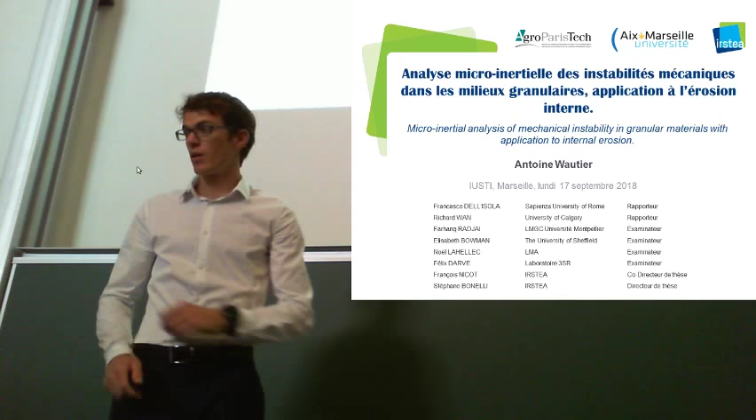So the general context of my research lies in the assessment of the mechanical stability of hydraulic structures, such as dikes or dams. Most of the time, these hydraulic structures are built of natural compacted granular materials, and they are thus permeable to internal fluid flows and sometimes subjected to internal erosion. In the worst cases, internal erosion can cause the catastrophic failure of the hydraulic structure.

To give a few figures, in France we count today more than 19,000 kilometers of dikes with an average failure of one dike per year. Among these failures, 45% are attributed to internal erosion processes.

As a result, this generates the following questions, which were the initial motivation to found my PhD. How does an internal fluid flow affect the mechanical stability of a dike? Will the dike eventually break when it is subjected to internal erosion? Can we know when? How can we build more resilient dikes? And how often should we repair old dikes subjected to internal erosion? Today, nonetheless, I will focus only on this first question.

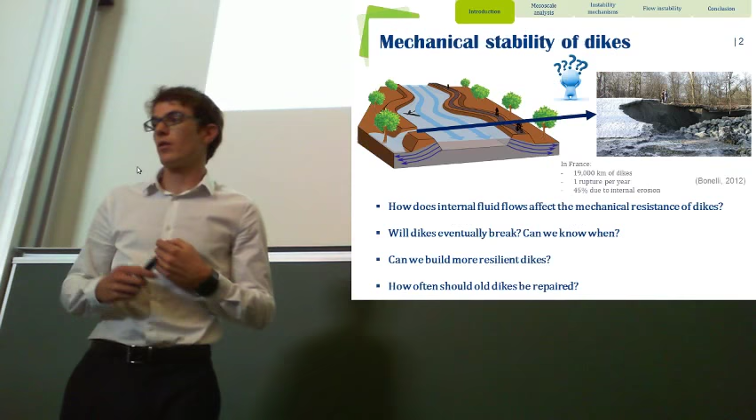Following an international workshop in 2005, it is now widely acknowledged that internal erosion can be subdivided into four elementary mechanisms, namely the backward erosion process, the contact erosion process, piping erosion, and suffusion. Suffusion, which is the selective erosion of the finest particles of a soil, is the least understood of these four mechanisms, and the only one for which there still exists no practical recommendation to prevent its occurrence.

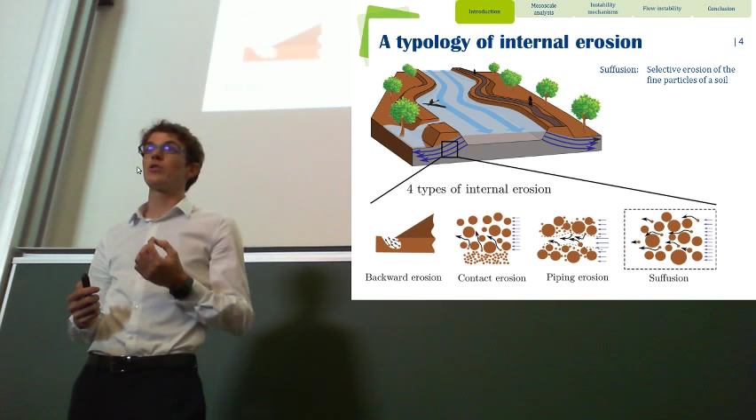In addition, compared to the three other types of internal erosion, suffusion is specific because it is indeed a material scale issue. Locally, an internal fluid flow modifies the microstructure of a granular material, which in turn changes its constitutive behavior at the material point scale.

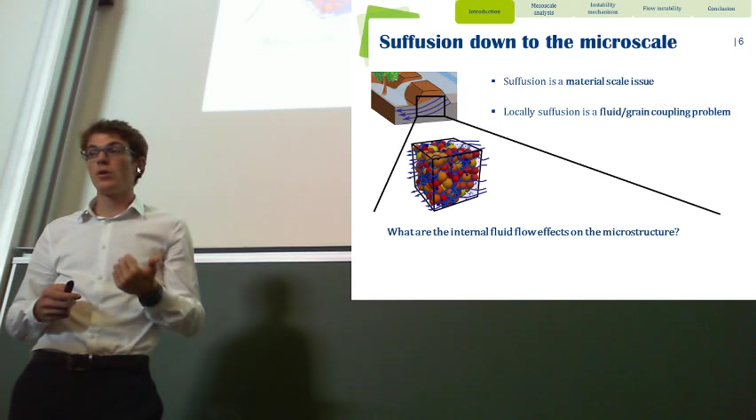From an engineering point of view, taking into account suffusion into the numerical modeling of hydraulic structures has to be done thanks to an evolution of the constitutive parameters of the behavior of the soil at the dike scale. But what are the internal fluid flow effects in terms of microstructure evolution, and how does this affect the mechanical behavior of the soil?

These questions are indeed quite difficult to answer, and this is the reason why historically suffusion was assessed thanks to an internal stability approach. A soil is assessed to be internally stable if it can retain its fine particles inside the material. As a result, most of the existing criteria used to assess the susceptibility of a soil with respect to suffusion are based on geometrical consideration in order to prevent the loss of fine particles. But this criterion dismisses completely the consequences in terms of mechanical behavior.

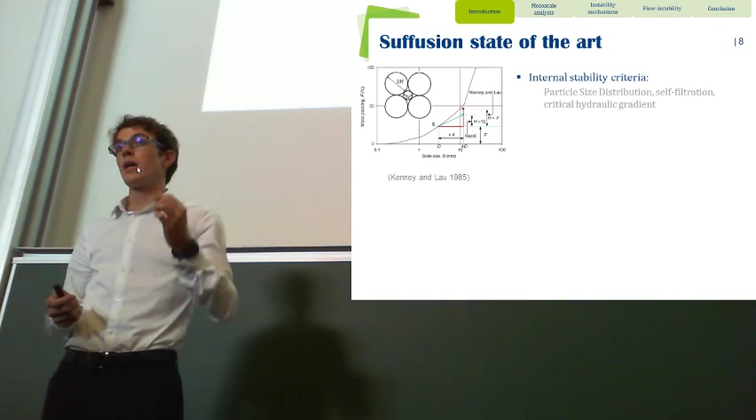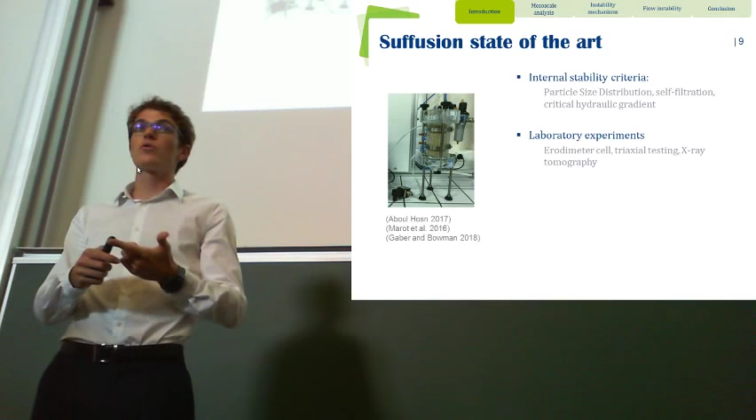In the lab, suffusion has been widely tested thanks to the use of erodimeter cells, and sometimes these cells coupled with triaxial apparatus. This enabled testing of the validity of the different internal stability criteria found in the literature, and also to start exploring the mechanical consequence of suffusion.

More recently, with the increased computational power at our disposal, we found more and more numerical studies aiming at providing some micromechanical basis for this internal stability criterion, and also to start exploring and modeling suffusion directly at the microscale thanks to fluid grain coupling schemes.

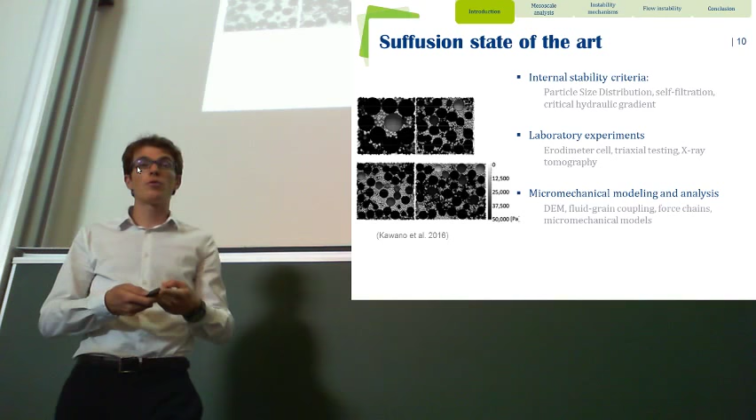However, so far, all these approaches have some limitations, and I'd like to mention a few of them. From the experimental side, it has been reported several times that in the erodimeter cells, suffusion tends to localize along the boundary of the erodimeter cell. As a result, what is measured experimentally is not necessarily a material scale issue, but is strongly influenced by the geometry of the erodimeter cell.

Moreover, even if some apparatus exists in the world, it is still very difficult experimentally to impose simultaneously a mechanical stress loading and a hydraulic loading. As a result, there are still few studies that can account for the influence of the stress state on the occurrence of suffusion.

On the numerical side, the 3D fully coupled fluid grain coupling problem is still very computationally expensive, and many numerical analyses performed to address the problem of suffusion tackle this problem either by not plugging the fluid in and using particle removal processes, imposing a partial fluid grain coupling, or even sometimes by dealing with non-physical 2D problems.

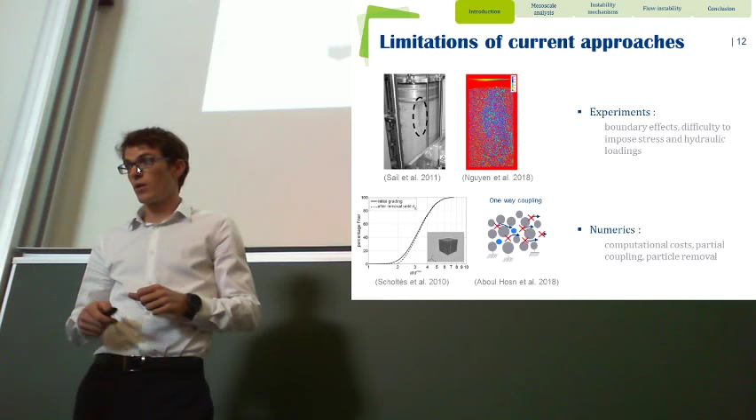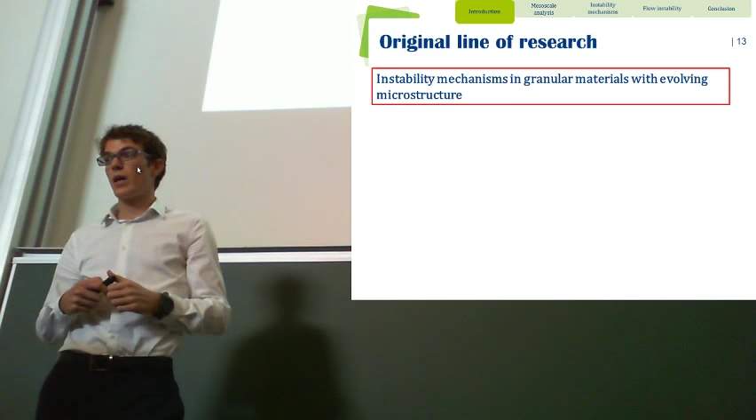In order to avoid producing this same bias, the original line of research I developed in my PhD was to step back and address the more fundamental issue of instability mechanisms in granular materials with an evolving microstructure. In order to address this issue, my methodology was focused on three points.

First, model the full complexity of the physical process at the representative elementary volume scale in 3D, with the use of a fully coupled and fully resolved fluid-grain coupling scheme. Then replace the concept of internal stability by the concept of mechanical stability, achieved thanks to the general criterion of the second-order work.

And then adopt a micromechanical point of view in order to analyze the driving physics of granular materials at the mesoscopic scale and understand what could be the mechanisms responsible for instability linked to suffusion.

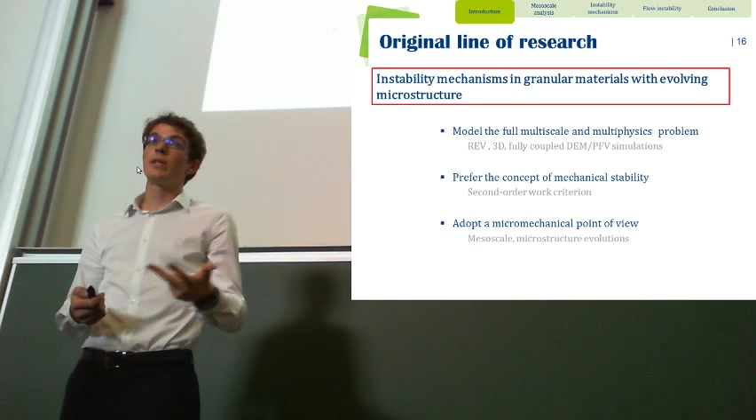In the remaining slide of this extended introduction, I'd like to mention the tools and the conceptual framework that back my PhD. The first tool I want to introduce is the numerical code I use to perform all my numerical experiments. I use YADE software, which is an open source DEM code developed at the 3SR lab in Grenoble.

In this code, both the grain-grain interaction is accounted for thanks to the simple elasto-frictional contact law, and the fluid-grain coupling scheme thanks to the recently developed pore-scale finite volume scheme, which enables the fluid-grain interaction to be accounted for locally with a fully coupled and fully resolved numerical scheme.

And today, it is probably one of the few coupling schemes that enable tackling 3D problems at the scale of the representative elementary volume.

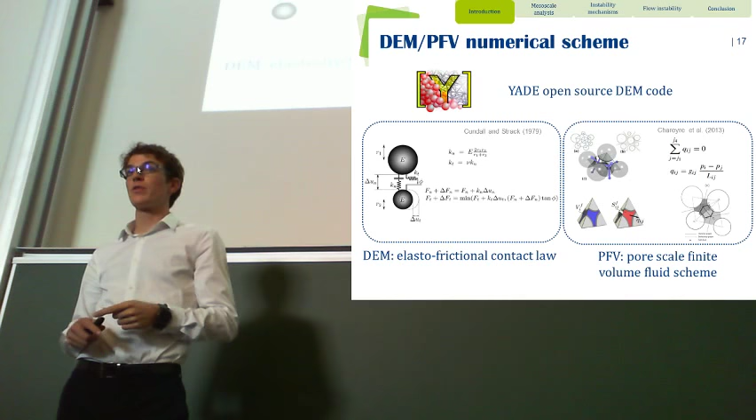When a stress state is applied to a granular material, the granular materials reorganize to build elongated structures able to transmit stresses through the medium. As a result, a granular material can be seen as a two-phase medium, with chain grains that transmit stresses in the medium, and non-chain grains that provide lateral support to the elongated structures.

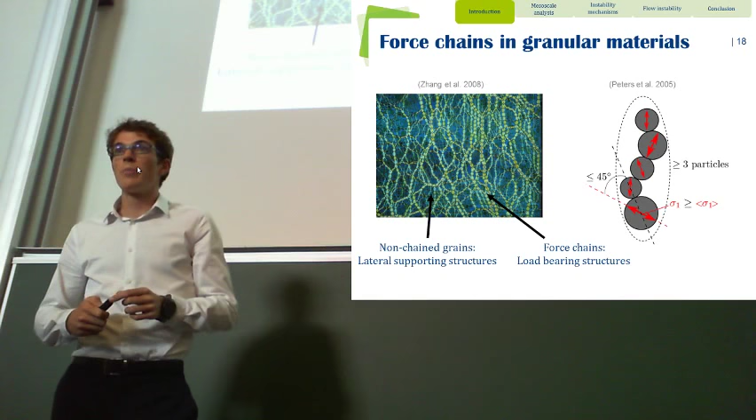In all my PhD work, I used the definition of force chains introduced by Peters et al. in 2005 to define what I call a force chain in my medium. This definition is based on three criteria.

First, the grain should be heavily stressed, meaning that the principal stress in each grain should be higher than the average principal stress in all the grains. Then the direction of compression should be aligned with the direction of contact between two adjacent chain grains.

And then a force chain should be constituted of at least 3 particles, in order to generate some internal degrees of freedom and deal with a real structure.

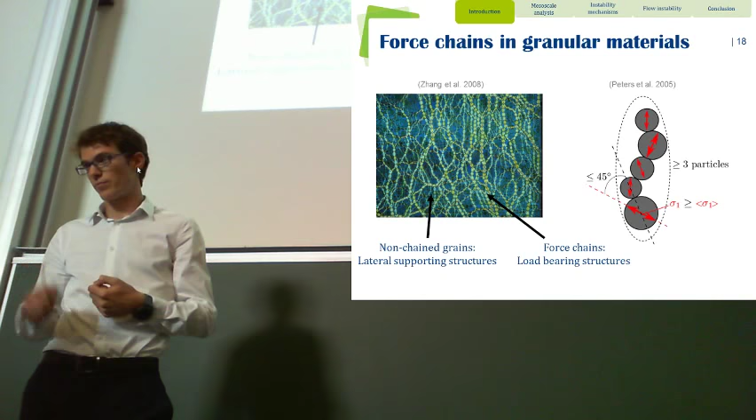As I started to mention earlier in my introduction, I wanted to replace the widely used concept of internal stability by the concept of mechanical stability. Because what is really at stake when we consider suffusion in dikes is the creation, by the fluid, of an underlying mechanical instability that will be triggered later on when the mechanical loading is slightly changed.

So the real question at stake to address the consequences of suffusion is: what will happen if the mechanical loading is slightly changed? Will our material collapse or not?

Starting from an equilibrium state, the variation of kinetic energy is the sum of two terms: one applied on the external boundary of the solid considered, and one being minus the integral of the second-order work inside the medium.

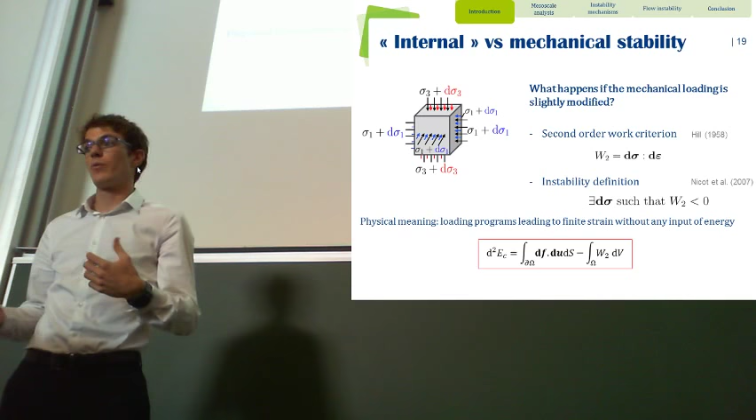More or less, this cone of instability corresponds to this physical situation where we impose macroscopically a slight deconfinement of the sample.

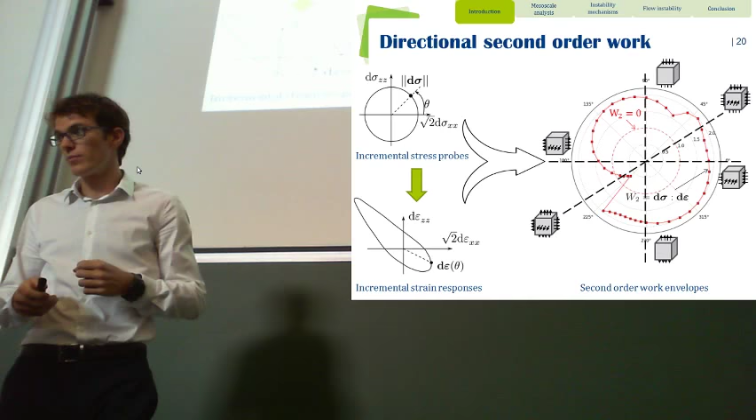So the rest of my presentation will be divided into 3 parts, corresponding more or less to 1 year each of my PhD.

First, I want to introduce the definition of mesoscopic scales in granular material. If we want to study the suffusion phenomenon at the material point scale, there is a need to define a sample of soil sufficiently big to be representative of the phenomenon. This will be the first part of my presentation today.

Then I will show you some results on the onset, detailing the driving mechanisms responsible for instability in dry granular materials. And then I will conclude by showing you the specific impact of a fluid on the mechanical stability of a granular material.

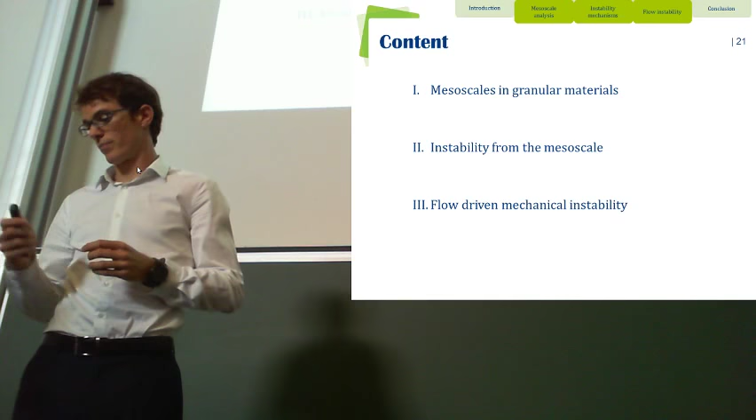From a conceptual point of view, the whole domain occupied by a granular material can be decomposed into 4 subdomains. On the grain side, we can distinguish between heavily stressed grain and loosely stressed grain by defining chained and unchained grain.

On the fluid side, we can replace the complex geometry of the pore space with 2 pore networks: an accessible pore network and a non-accessible pore network, with respect to the size of the particles moving through the pore space.

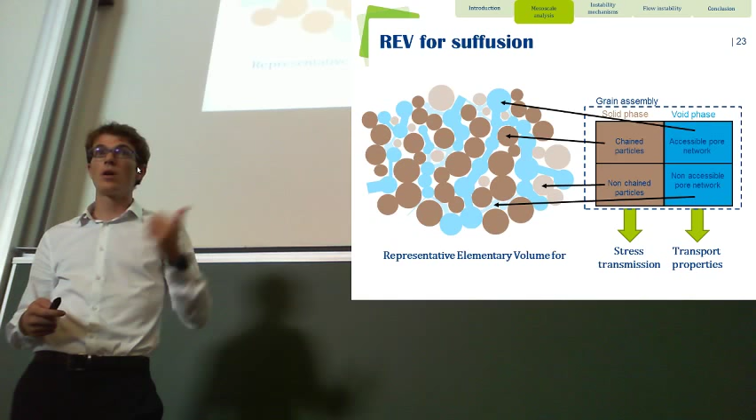These partitions introduce two elementary scales in between the grain scale and the hydraulic structure scale that I will call mesoscopic scale, enabling the definition of a representative elementary volume with respect to both stress transmission and transport properties inside the medium.

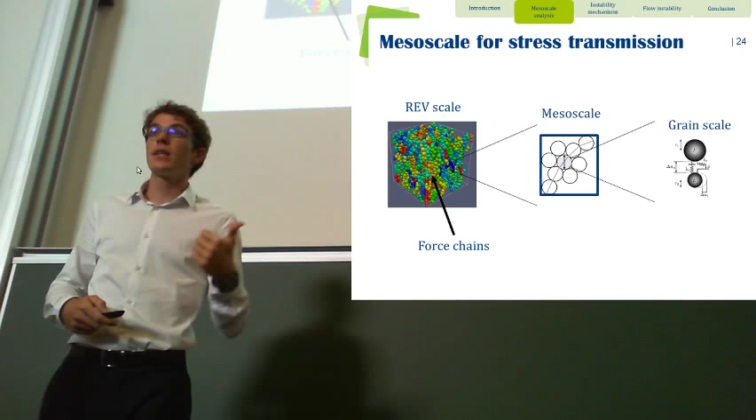For stress, we can distinguish between chained and unchained grain. Actually, the mesoscopic scale here in between the grain scale and the material point scale is linked to the spatial distribution of force chains.

In practice, to quantify this spatial distribution, we can use the 2-point spatial autocorrelation function. This is C of h, defined as the joint probability that a given point x and the translated point x plus h simultaneously belong to the chained particles.

If the vector h is 0, we simply recover the volume fraction of the chained particles in the material. On the contrary, if h tends to infinity, because of the independence of probability, we get the square of this volume fraction. So if we renormalize this function in this form, we get a function that decreases from 1 to 0 as h goes from 0 to infinity.

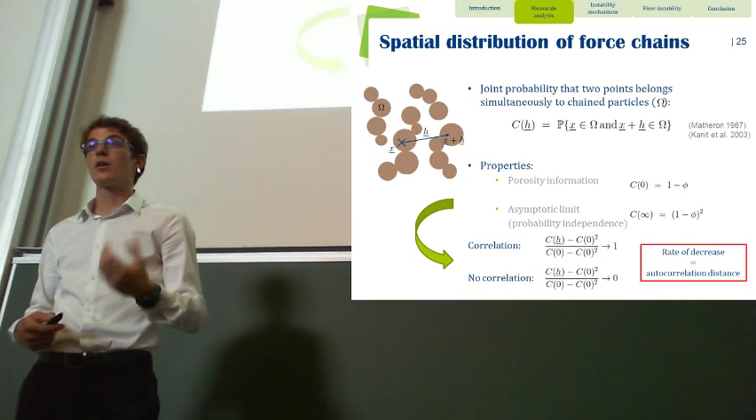The rate of decrease of this function gives us the autocorrelation distance in our material for any direction h. In practice, we have 3 principal directions oriented with the 3 principal axes of the principal stress loading directions, and we estimate these distances numerically using an exponential fit, introducing 3 length scale parameters which constitute my 3 length scales characterizing stress transmission in the granular material.

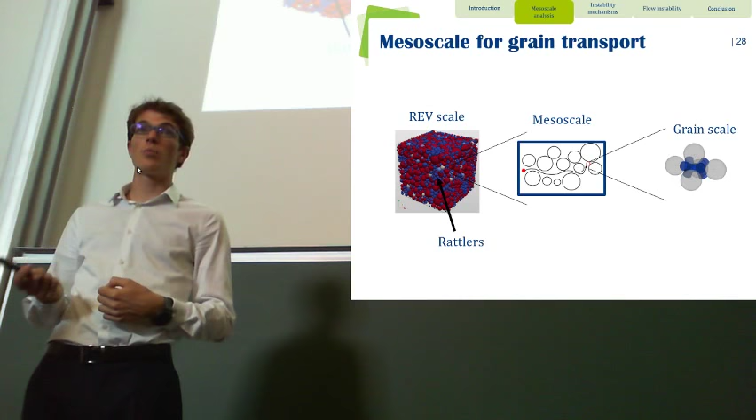and the rattling particles with 0 coordination number in absence of gravity, shown in blue, we want a good idea of how far the blue particle will travel to assess the representativeness of our sample for studying transport properties. This is done by replacing the complex geometry of the pore space with a mathematical oriented graph.

In my PhD, two different graphs have been proposed: one based on the tessellation of the pore space based on all particles, including the free particles, and one based on the tessellation of the void based only on the particles that are geometrically blocked.

This defines the geometry of the pore network, and then to get the orientation, we have to define a pressure map on it. We have two ways of defining this: either by simply linearizing a macroscopic pressure gradient, or by taking into account local pressure fluctuations, done thanks to the application of a pore scale finite volume scheme.

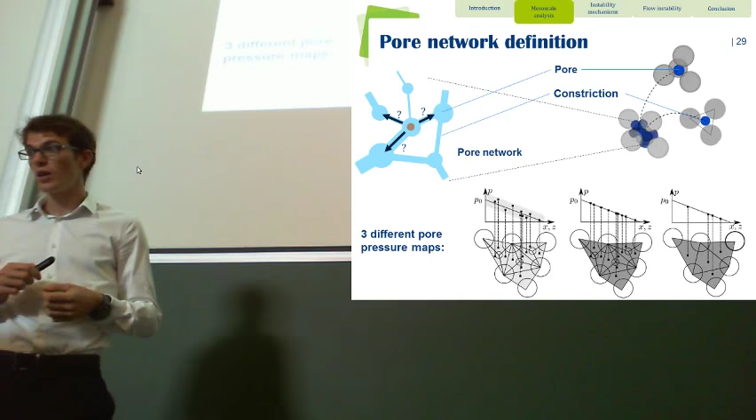The last ingredient to get the oriented mathematical graph is to define a flow intensity propagation criterion. This is based on two assumptions: that a fluid between two adjacent pores will flow in a circular tube as a Poiseuille flow, and that the force acting on a particle traveling inside the pore space will scale as a viscous drag force, proportional to the fluid velocity.

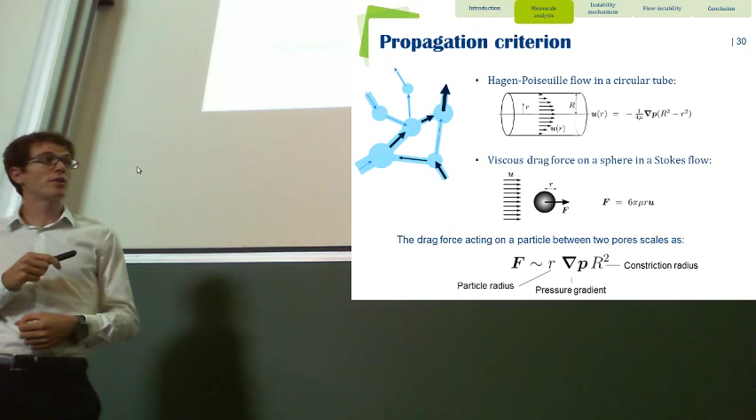As a result, the driving force that makes particles move inside the pore space should be equal to the particle size times the pressure gradient times the constriction radius squared. These two last terms constitute what I call the flow intensity in my pore network.

A particle in this network will then move according to the path of maximal flow intensity until it gets blocked by too narrow constrictions. This enables us to assess transport properties inside the pore space without running any fully coupled fluid-grain simulation.

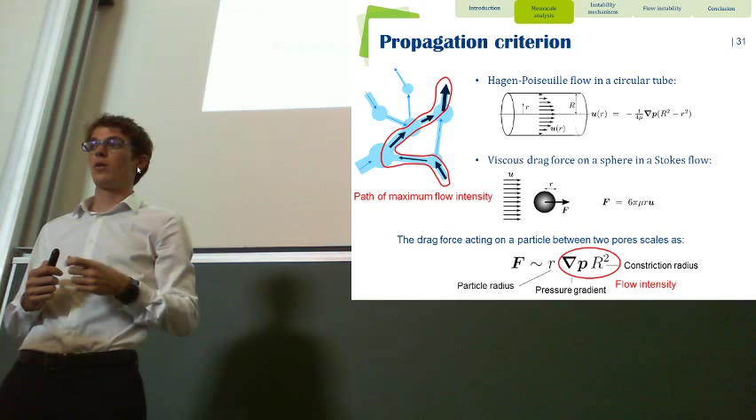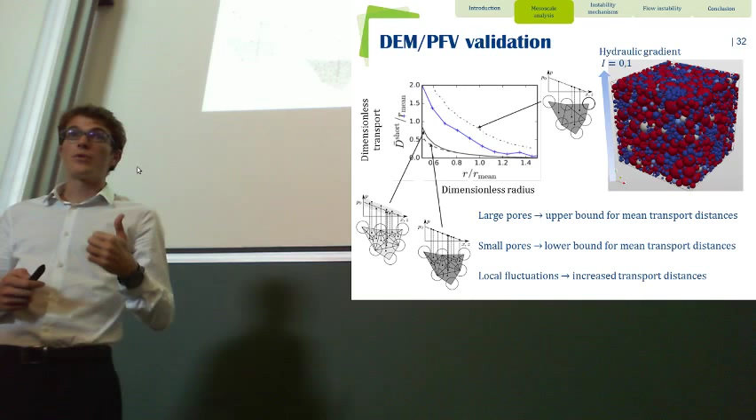Now that we have defined a sample representative for studying suffusion, I want to show you some results highlighting the driving mechanisms at the mesoscopic scale responsible for the vanishing of the second-order work criterion.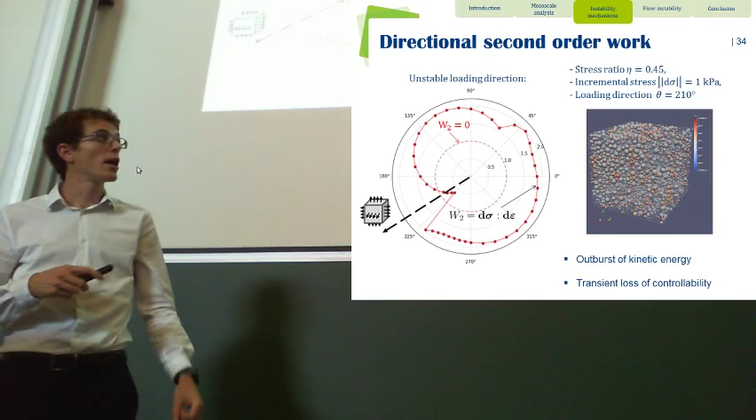As a result, we see a nucleation of an outburst of kinetic energy that rapidly propagates to the whole sample, generating generalized particle reorganization and, macroscopically, a transient loss of controllability.

To analyze what is going on inside our sample during this incremental loading, we use the force chain definition and define what we call force chain bending. For a group of three chain particles, this is defined by an angle beta, which evolves: if this angle increases, it means the force chain goes from a straight line configuration to a bending configuration.

On the left, I show on top the evolution of the average kinetic energy for all particles, in black, or for only the particles located in a small control volume around the location of the nucleation of the kinetic energy outburst.

On the bottom graph, I show you the mean evolution of the derivative of this angle, so the mean bending rate, either for the whole sample or for the local control volume here.

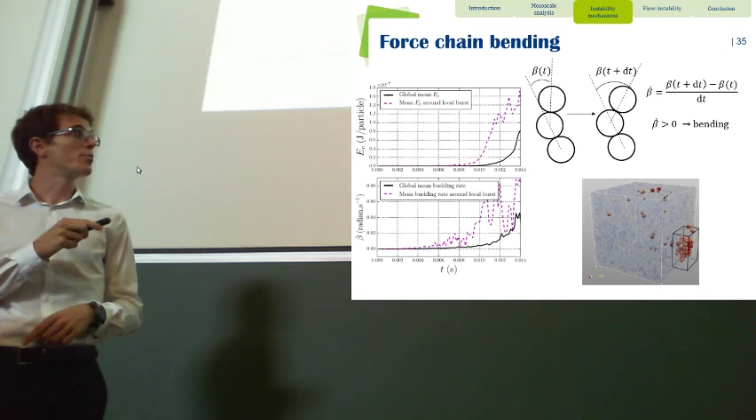What is shown by the comparison with these two graphs is that we have a localized bending which is preceding the loss of controllability and the outburst of kinetic energy.

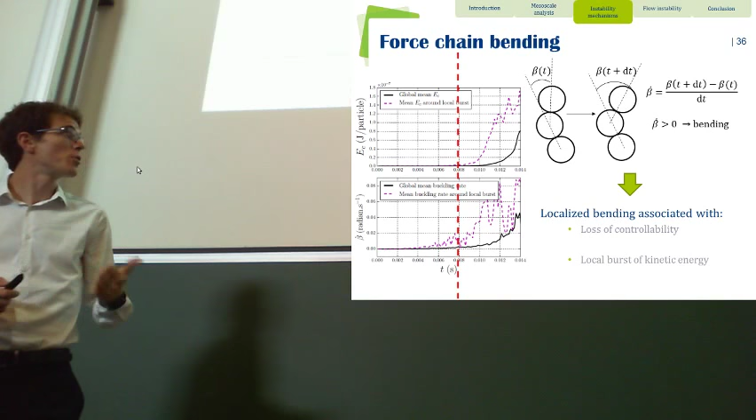Another micromechanical insight we can get from the definition of force chains is that we can track the number of contacts with respect to time while we are applying this incremental loading. Here, based on the force chain definition, we define 3 populations of contacts.

In blue, we have the contacts between non-chain and non-chain particles. In red, the contact between chain and chain particles. And more interesting are the contacts in green, which correspond to the contact between non-chain particles and chain particles.

On the left, I show you the evolution of the 3 contact populations, either for the whole sample, which is the graph on top, or for a small control volume around the location of the outburst of kinetic energy, which is materialized here by the 2 vertical black lines.

Here what is interesting to see is that first the number of contacts between chain and non-chain particles decreases, which means that we have a local deconfinement of the force chains, followed then by the bending of force chains, and then the collapse of force chains, and then a final increase in the number of non-chain contacts, because here we are considering a loose sample which is getting denser as collapse occurs.

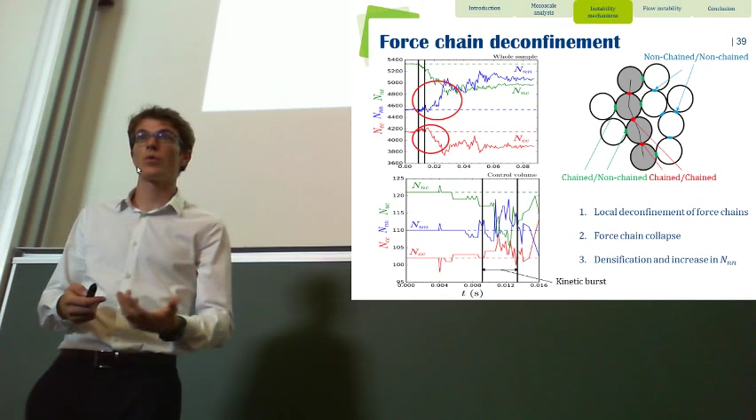Another thing we can do with DEM is to look at microstructure evolution impact on the mechanical stability. This is very easy, for instance, to increase or decrease the number of free particles inside our sample.

This is representative with respect to the suffusion mechanisms phenomenon we want to study, related to either the massive erosion of the fine particles of the sample or a massive clogging of particles as coming from upstream in the dike body.

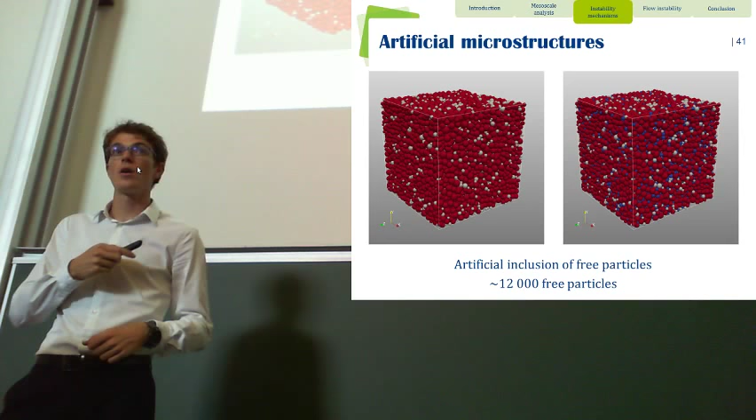On the contrary, here I show you this microstructure evolution when we include more free particles, with the blue particles on this graph. In terms of mechanical stability, if we perform a directional analysis and look at the circular diagram of the second-order work.

Here we see that in all cases we still have a vanishing of the second-order work criterion. So our material is still unstable with or without rattlers.

But what is interesting to look at is that the size of the cone of instability varies when we vary the number of free particles. And the more free particles you have in the sample, the more stable it is.

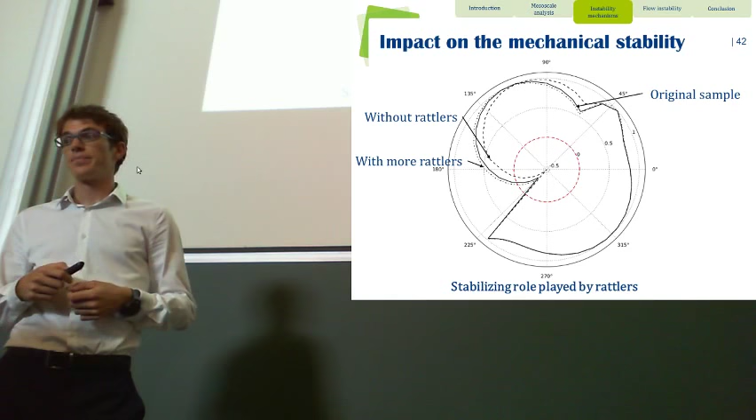This stabilizing role of free particles can be interpreted from a macroscopic point of view with the use of the classical paradigm of elastoplasticity. Indeed, rattlers, by getting jammed as force chains collapse, prevent the development of large incremental plastic strain.

This is the first impact on the constitutive behavior of the material played by rattlers. The second impact is a little more subtle and is linked to the fact that the stress state we are considering is not isotropic. As shown in the first part of my presentation, we have vertically oriented force chains in the medium, and when collapse occurs, it occurs principally along the direction of principal compression.

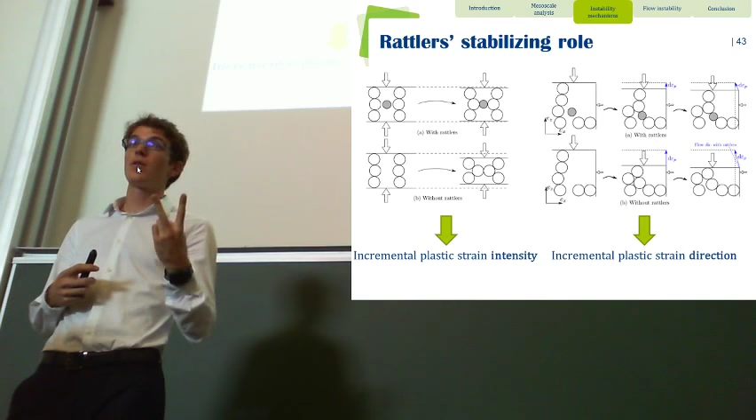So, the difference between the situation with or without rattlers generates a slight change in the direction of the incremental plastic flow. So these are the two impacts of rattlers on the constitutive behavior of a granular material.

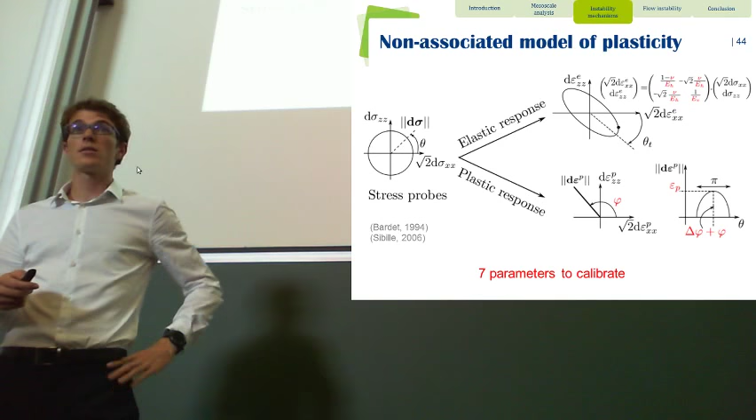If we calibrate these 7 parameters and look at the initial sample, we are perfectly able to reproduce the circular envelope obtained numerically by just fitting these 7 parameters.

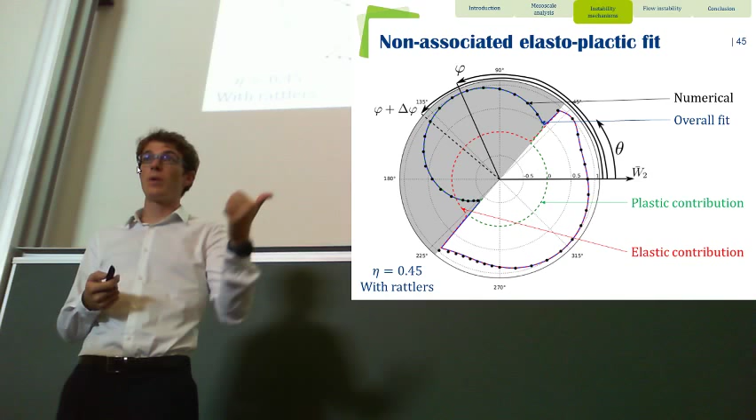And then, using the analysis from the macroscopic point of view, if we just tune the 2 parameters that are the plastic strain intensity and the plastic flow direction, we are able to adapt this model to describe the 2 artificial microstructures with more or with less rattlers, as shown on this graph. So this validates the particular role played by free particles inside the granular material with respect to mechanical stability.

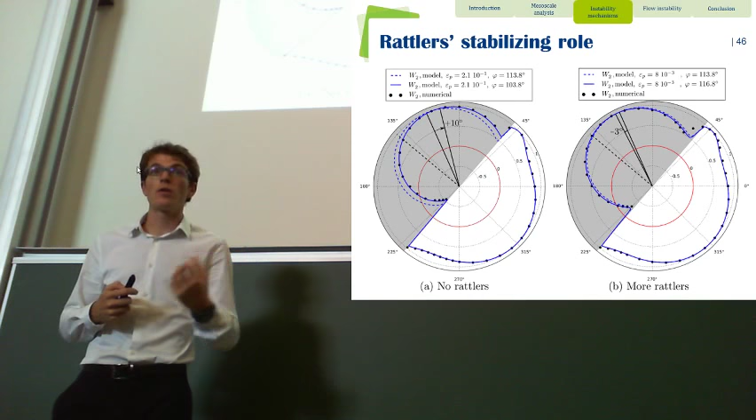To finish my presentation, I will show you some results obtained on the specific role played by the fluid with respect to the mechanical stability of granular material.

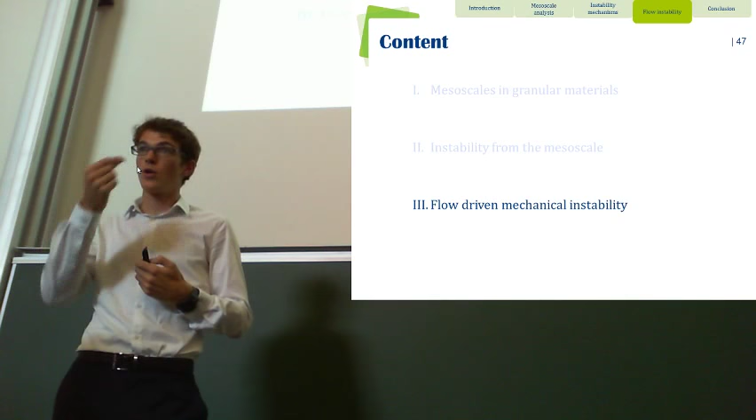Indeed, the fluid impact on a granular material is twofold. The first impact is to make the free particles inside the sample move, generating microstructure evolutions simply by the change of location of rattlers in the medium. The second impact is to introduce additional forces on the grains constituting the primary skeleton, forcing stress reorganization in the medium. So I will explore these two aspects in this part of my presentation.

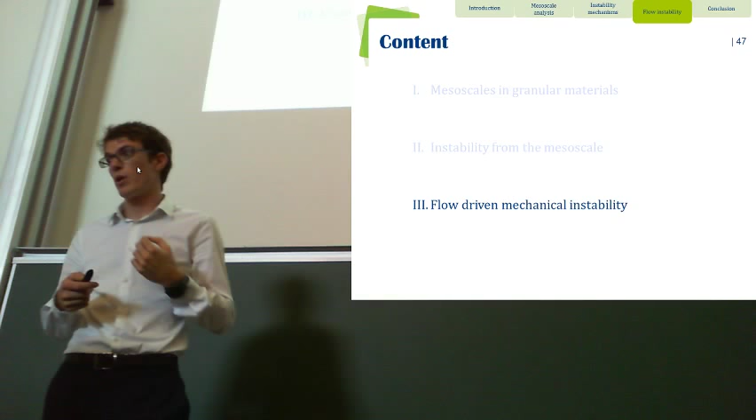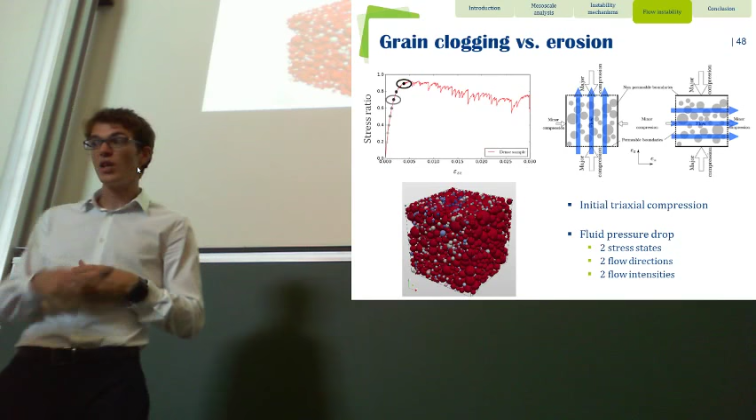The first aspect is the simple transport of free particles inside the medium. Here I am considering a widely graded sample with a quite significant fine fraction, and I am considering 6 simulations consisting of 2 stress states, shown on the classical drained triaxial loading curve, 2 flow directions, either parallel or perpendicular to the principal stress direction, and 2 flow intensities. Here is the situation of one of these 6 simulations.

The 2 samples, the 2 stress states I've been using are not chosen arbitrarily. One is considered to be stable from the mechanical point of view, and one is considered to be unstable, thanks to the use of the second-order work criterion.

But still, we can see the influence of both the stress state and the direction of the hydraulic loading. We have larger erosion if we consider flow oriented vertically, in the direction of the principal stress. And we have larger erosion if we consider the fluid flow for an unstable material.

This can be interpreted by looking again at force chains at the microscopic scale, because in the medium, force chains are oriented in the direction of compression, which makes it easier for a particle to be transported if the fluid flows along the direction of the force chain rather than perpendicular to it.

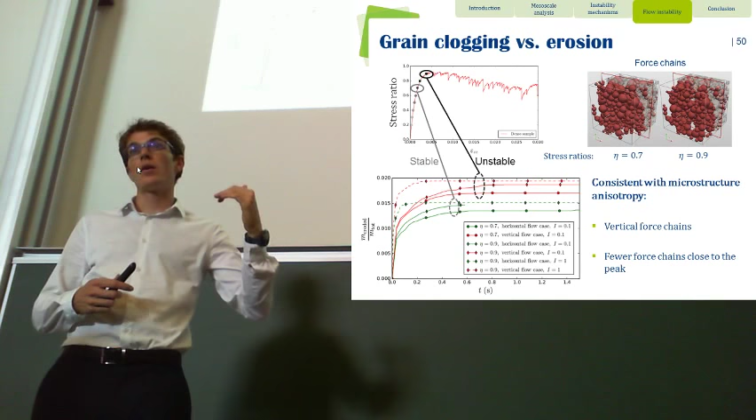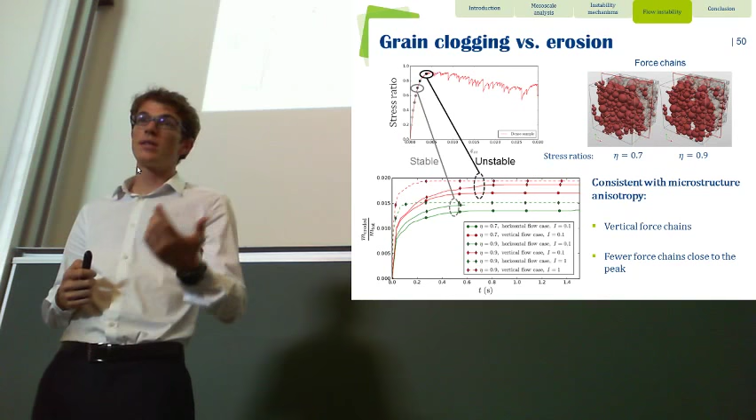The second aspect is that when we go from the stress state eta equal to 0.7 to 0.9, we are actually decreasing the number of force chains as we approach the peak stress and the softening regime, and we are increasing the number of rattlers in the sample. So it is normal to find that the sample at stress state eta equal to 0.9 is more sensitive to suffusion.

Then what is interesting to look at is the evolution of the mechanical stability of the sample before and after applying the fluid flow, and so before and after suffusion. Here, the black curve corresponds to the situation before the fluid flow is applied, and the two blue curves correspond to the situation where a vertical or horizontal fluid flow is applied.

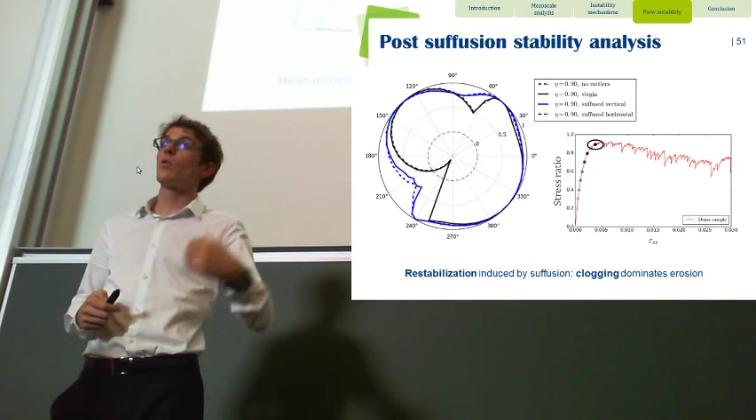What is interesting to see is that here the fluid has a restabilization effect. This is actually completely consistent with the particular role played by rattlers I showed you in the previous part of my presentation. Here, rattlers are not predominantly eroded from the sample, but mostly clogged inside the sample.

The second impact of the fluid I mentioned before presenting the results of this part, is the direct impact of the fluid forces onto the primary fabric of the granular material. Numerically, we can isolate this effect by considering a sample in which the rattlers have been removed before applying a fluid pressure drop. This is done here for two flow directions and for an unstable sample identified with the second-order work criterion.

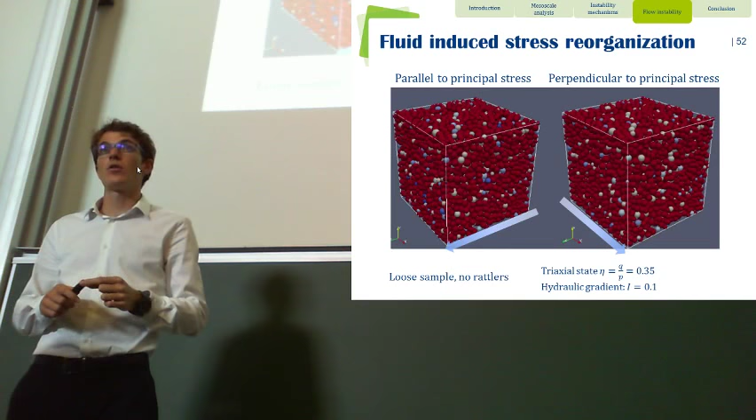In both cases, we observe the collapse of the sample under the fluid flow perturbations. The perturbation introduced by the fluid is able to trigger off the material collapse. This non-sensitivity of the collapse with respect to the fluid flow direction can be analyzed by looking at the distribution of fluid forces at the microscopic scale.

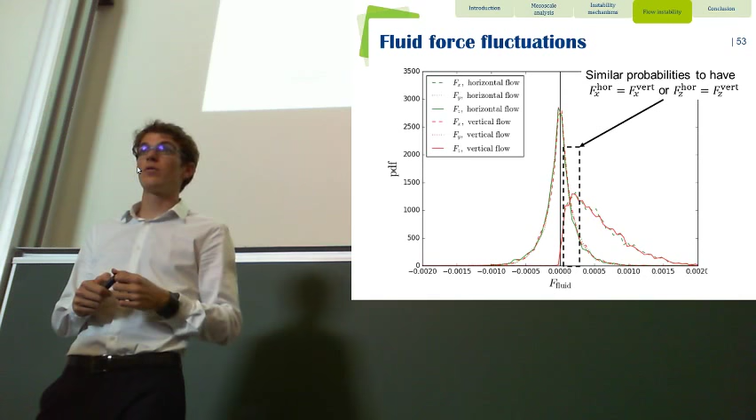As a result, local fluid force fluctuations play an important role in triggering the collapse of the sample. This also advocates in favor of the use of fully resolved fluid-grain coupling schemes.

Before answering your questions, I'd like to summarize my main contribution to the state of the art and provide some prospects for future research projects.

On the method and tools, I'd like to mention that the different micromechanical tools I've been using are not specific to the study of suffusion. I've encapsulated all my functions and methods into Python classes, and I will be happy to share this file with you if needed.

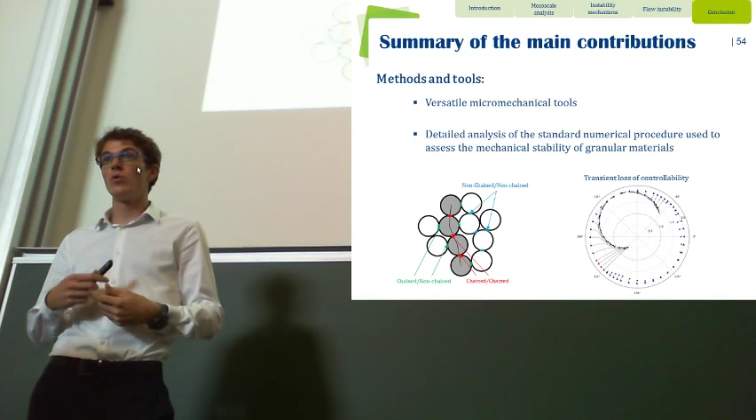The other point I'd like to mention on the methodology aspect is that I provide a detailed analysis of the methodology used to assess numerically the mechanical stability of a granular material. What is at stake from a macroscopic point of view is the use of the classical paradigm of continuum mechanics and, most of the time, quasi-staticity. But locally, the behavior of granular materials is inherently dynamic and results from particle reorganizations. So we have to be careful when applying continuum mechanics tools to the study of the mechanical stability of granular materials.

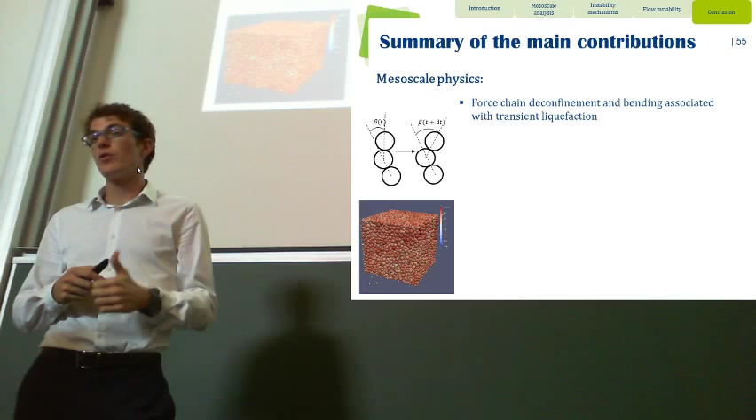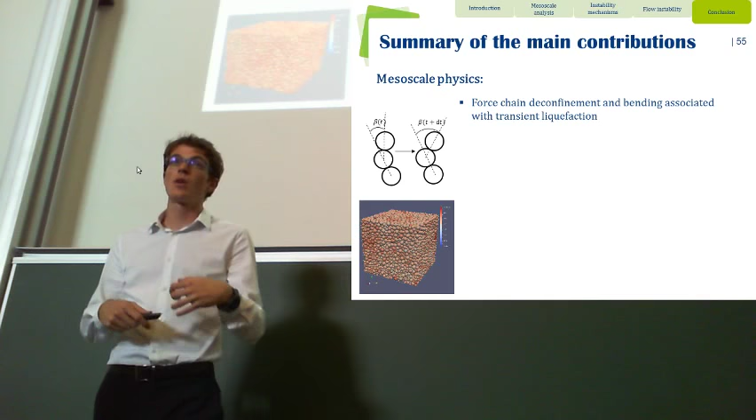I also highlighted some driving mechanisms in granular materials at the mesoscopic scale, and I'd like to summarize the main results I obtained. First, I show that the vanishing of the second order work is linked to force-chain deconfinement and force-chain bending. These are the two preceding mechanisms appearing before the failure of the sample.

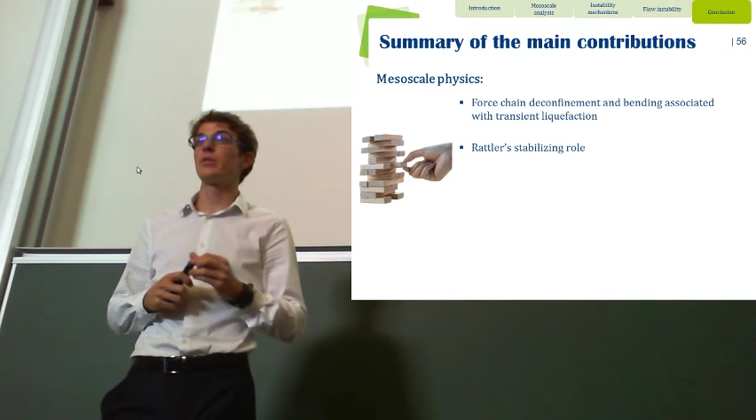Then I show that rattlers, or free particles, in granular materials have a fundamental role to play with respect to the mechanical stability of granular materials. This is very important with respect to suffusion, because clogging and erosion have antagonistic effects on the evolution of the mechanical stability of a granular material.

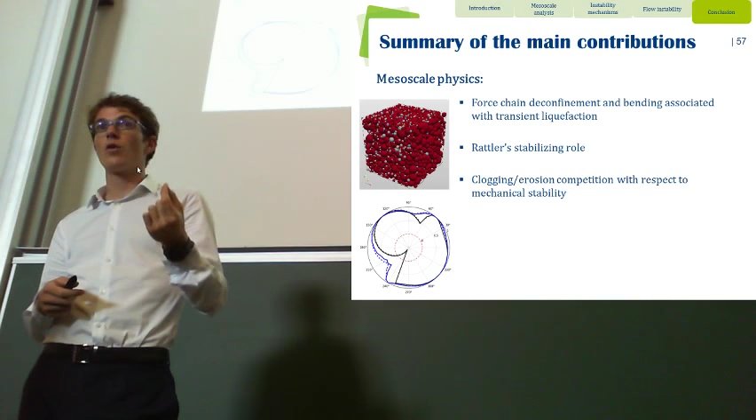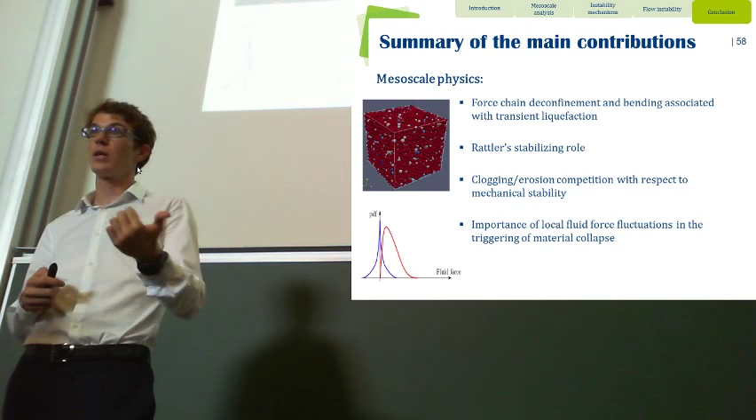The local fluctuations are important and should be accounted for in order to see whether a fluid flow is able to trigger the collapse of a granular material or not. And the last result I'd like to mention, which I didn't show in my presentation, is the fact that grain detachment is a non-local phenomenon.

What I observed numerically is that first we have force chain reorganization, which generates the global creation of rattlers that are then transported within the medium. This is not the action of fluid on a specific particle, so we cannot use a Shields-like criterion to study the detachment in the suffusion process.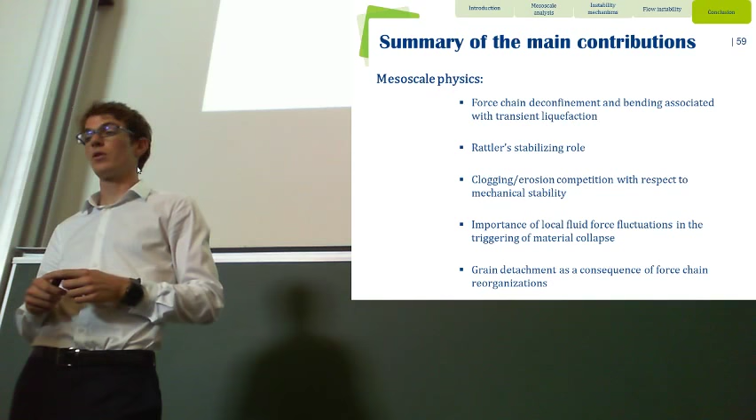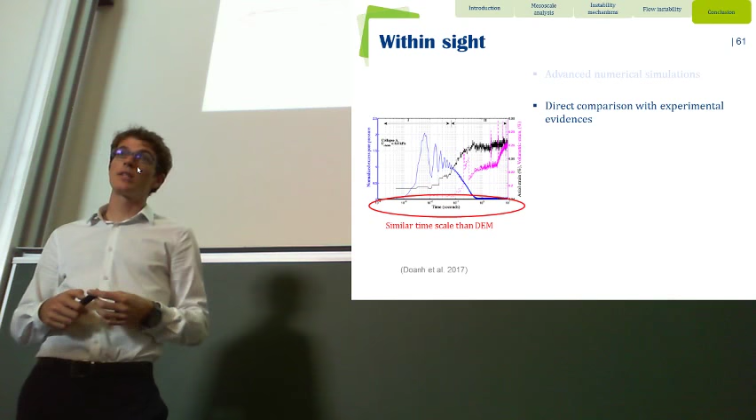In my PhD, I didn't compare my numerical experiments to real ones, simply because both the time scale and the length scale accessible numerically are not comparable to what is done in the lab. However, there still exist a few experimental studies with a time resolution quite similar to what is accessible numerically, and we are currently investigating the possibility of reproducing these results numerically.

Probably one of the best main perspectives of my work is the development of micromechanical models to bridge the gap between the micro and macroscopic scale. The results I showed you, obtained in my PhD, cannot be used directly at the scale of hydraulic structures, but they can be used to define mesoscopic micromechanical models that capture the physics of granular materials, and then upscale thanks to the use of nicely designed micromechanical models.

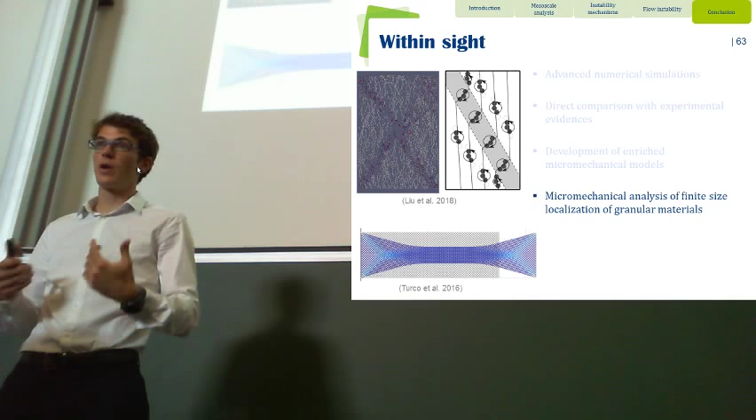The different micromechanical tools developed are not specific to the study of suffusion, and they can easily be transposed to analyze other striking features of granular materials. One of those, reported several times in the literature, is strain localization in granular materials, and the fact that we have a finite length of localization.